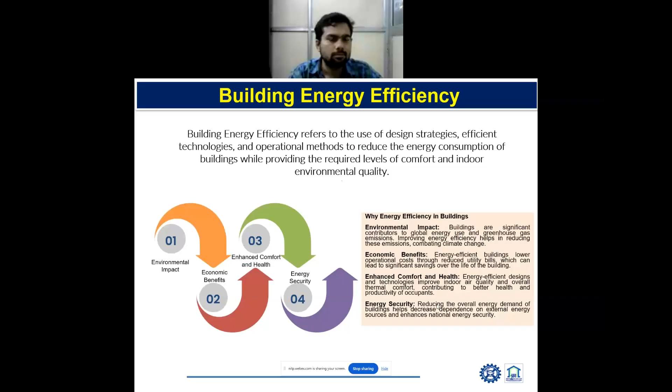So we need the design of the building in such a way that can take the fresh air while reducing the heat load or cooling loads. The fourth one is energy security: reducing the overall energy demand of the building helps decrease dependence on external energy sources and enhance national energy security.

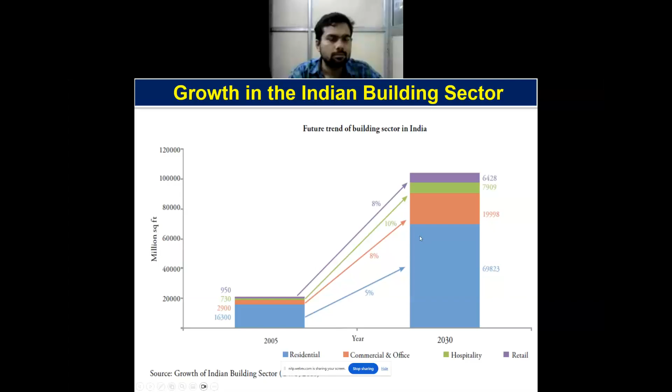So basically, what is the need? What is the strategy? Actually, we have two major measures that can reduce the energy consumption in the building. One is the passive measure, which can reduce the energy consumption in the building by reducing the heat load, reducing the cooling demand, reducing the energy use of light by using natural daylight, reducing the energy used for heating water, good housekeeping and people solutions, reducing the energy requirement for ventilation.

So these are the basic parameters: by designing and operating the building in an appropriate way, 40% of energy consumption in the building can be reduced, and the rest of the 60% energy we can take from renewable sources. So in this way we can achieve the net zero building, a 100% grid independent net zero building.

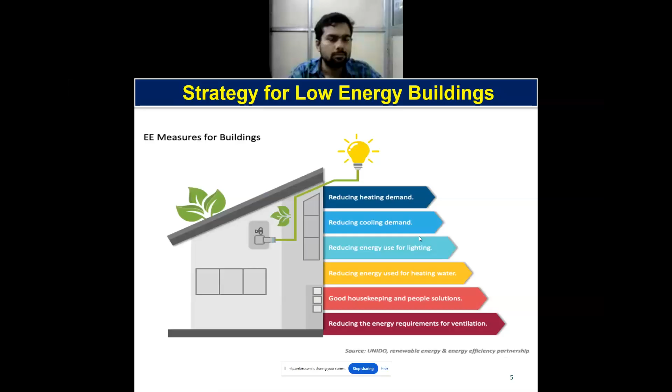So, in the previous slide, we discussed the passive techniques and the active techniques. The passive approach reduces the need for mechanical heating and cooling through design and construction techniques. Basically, in this passive technique, the major component of the building is the envelope, where we have the insulated wall, insulated roof, and natural ventilation, where we do not need any energy input to run the building. So the building envelope, smart glazing, and insulated roof come into the category of the passive parameters.

In the active category come systems like efficient HVAC systems, efficient artificial lighting, and efficient equipment. These techniques involve saving energy by efficient equipment, such as through mechanical systems, technology driven solutions, or integration of renewable energy. So these two parameters combine together to form a green building or net zero building.

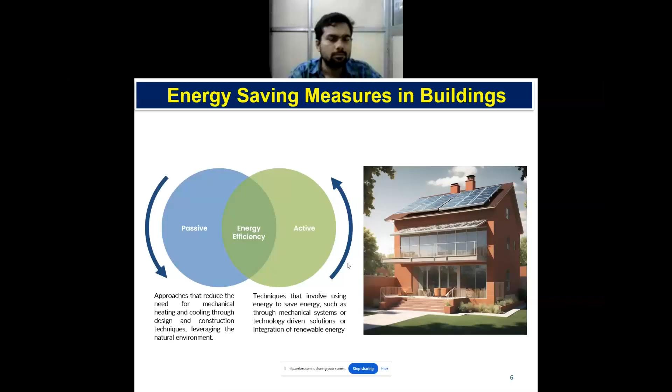So basically, how can we save energy in the building? By designing the proper building envelope. The purpose of the building envelope is to reduce the heat transfer from outside to the building or building to the outside. So it restricts the heat transfer, and basically reduces the HVAC load. The other point is the heat storage system. We can store the heat in the building, and then we can utilize it when we need it.

So passive strategies refer to building physics, in which the building geometry, natural daylight, and natural ventilation come into the category. Building geometry is an important aspect of the building, which can reduce the solar heat gain into the building. Natural lighting: the maximum amount of light we can get through the glazing. And natural ventilation can reduce the heating load or cooling load.

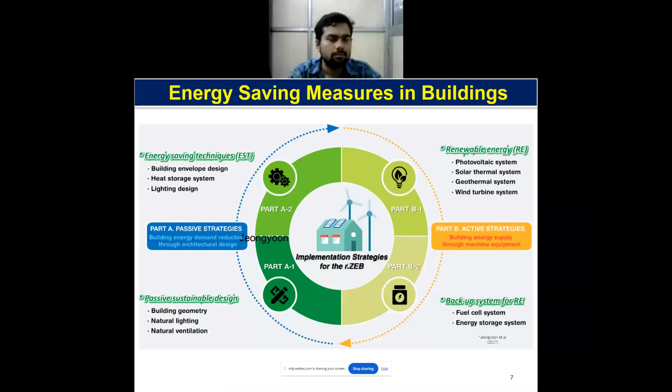Net zero energy consumption over here. So sir, your presentation is not visible. It is visible? Yes, sir. Now it's visible, sir.

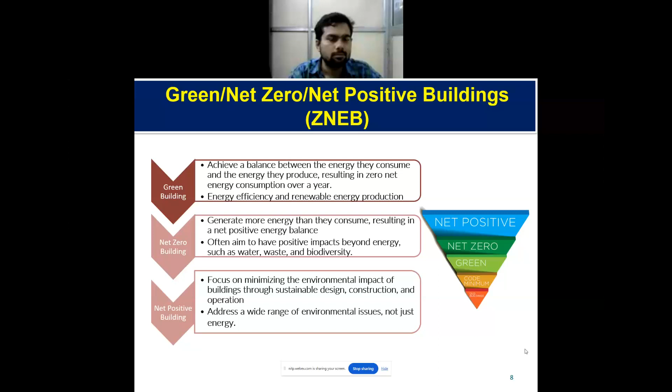Okay. So basically, green building, net zero building, and net positive building. Every green building can be a net zero building or net positive building. A net zero building is the building that can generate the same amount of energy that is consumed in the building. But a net positive building is when we are generating more energy in comparison to the consumption of the building. So every green building may be a net zero building or net positive building, but every net positive building or net zero building cannot be a green building.

So basically this is the roadmap to achieve the net zero building. A few major considerations are important for achieving the net zero building. First is the building physics, that comes into the category of the passive strategies. The maximum energy efficiency comes into the category of the active technology, the renewable energy, and the active strategies themselves.

So in the passive building physics, there are a number of parameters which can be considered to reduce the heat load of the building, like building massing, solar orientations, building envelope, natural ventilation, natural daylight, cool roof, night radiative cooling, low energy materials, and low carbon materials. They are the important parameters that can be considered to reduce the heat load of the building.

So if we have perfect insulation of the building envelope, or perfectly insulated roofing, we can restrict the heat transfer from outside into the building. It can reduce the heat load, and by reducing the heat load, we can use a low capacity HVAC system. Solar orientation is also important.

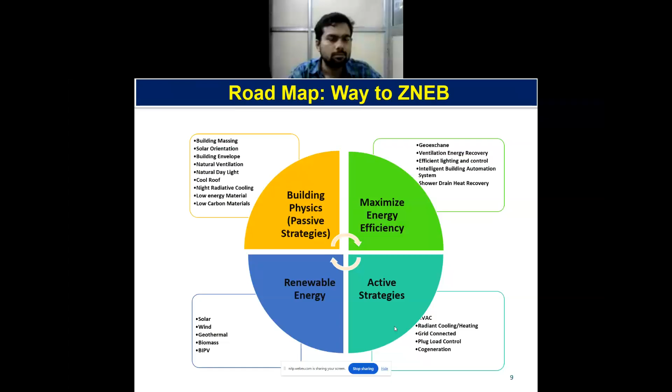So to maximize the energy efficiency, we can use geo exchange ventilation, energy recovery, efficient lighting and control, intelligent building automation system, shower drain heat recovery. We can integrate the renewable energy: wind, geothermal, biomass, BIPV. The active strategies: HVAC system, radiant cooling, heating, grid connected plug load control, cogeneration system. So by implementing these technologies, we can get the net zero building or even net positive buildings.

So these are the strategies in the passive solar design: orientation and window placement are very important. Window placement should be in such a way that in the summer it reduces the heat gain into the building, but in the winter it can provide the maximum solar gain to maintain a high temperature in the building. So window placement and shading devices also play an important role in the building envelope. So these are the three important parameters: orientation, window placement, and shading devices.

In the building envelope: insulation, air tightness, and double or triple glazing. Basically, the insulation restricts the heat. Air tightness: if we have natural ventilation or a 100% HVAC system, the infiltration of air can increase the heat load. So buildings should be designed in such a way that they reduce the air infiltration.

Glazing, double glazing or triple glazing, that can help to increase the solar intensity into the building, but it can reduce the heat load. Natural ventilation, cross ventilation, stack ventilation, and the ventilation towers. So these techniques can help to use the natural ventilation into the building.

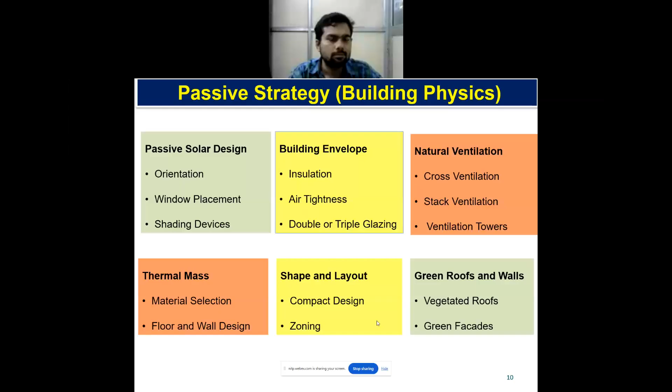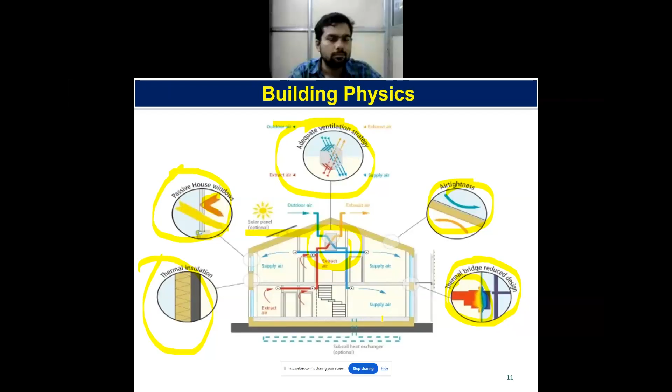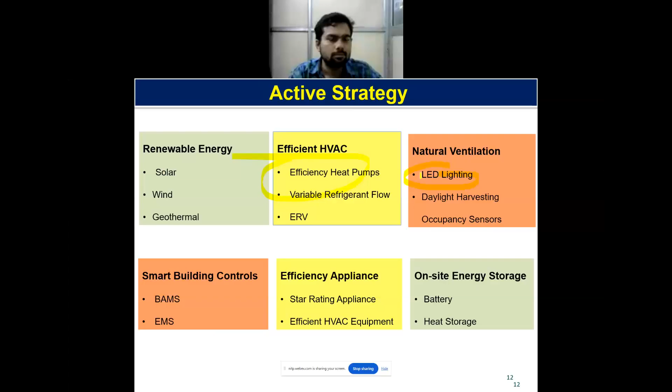And we can use natural daylighting in combination with artificial lighting, daylight harvesting, and occupancy sensors. We can also use building automation and management systems for controlling the equipment in the building like the HVAC system, artificial light, and other equipment. So when we need it, it can be on, and when we do not need these systems, it can be off automatically.

Now we have other equipment that comes with energy efficiency, with star rating appliances, like ACs, washing machines, refrigerators. So we can use the high star rating appliances provided by various companies nowadays. So we can use highly efficient equipment.

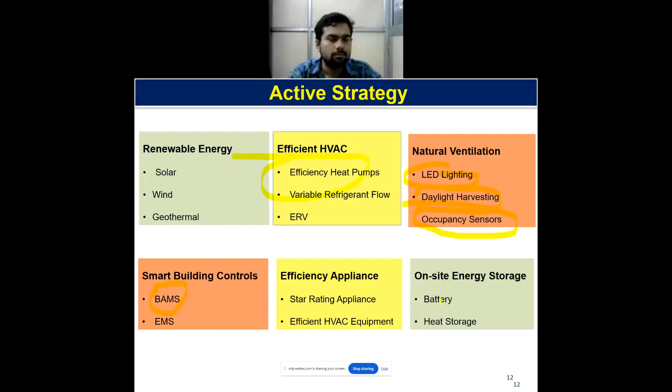Other is the on-site energy storage. We can store the renewable energy in the form of battery or heat storage. So excess energy can be stored, and we can use it when there is no energy supply, or even use it in the night time.

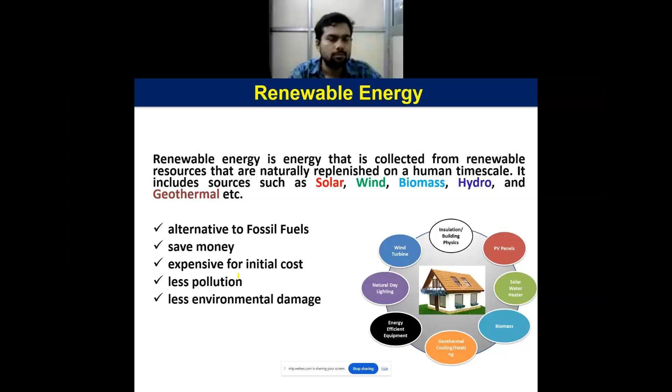So these are renewable energy sources that can be renewed time to time, unlike fossil fuels like crude oil, which can be finished after a few years. But the renewable energy sources do not finish; by nature they can be renewed again and again for the next usage.

So the first one is solar energy. Solar energy basically has huge potential in the form of renewable energy.

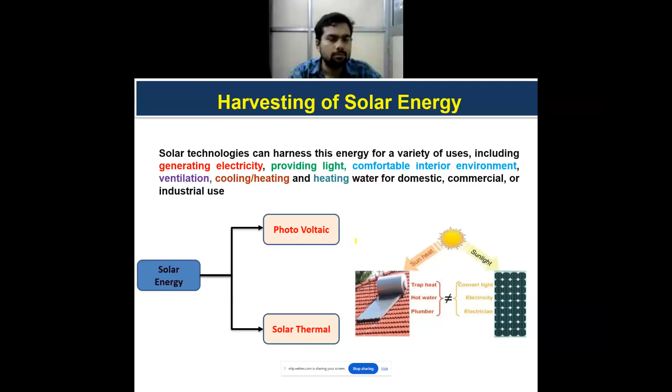But we can also use thermal energy in the building in the form of hot water, cooling, heating, in different systems such as a hot water heater, or for heating the building.

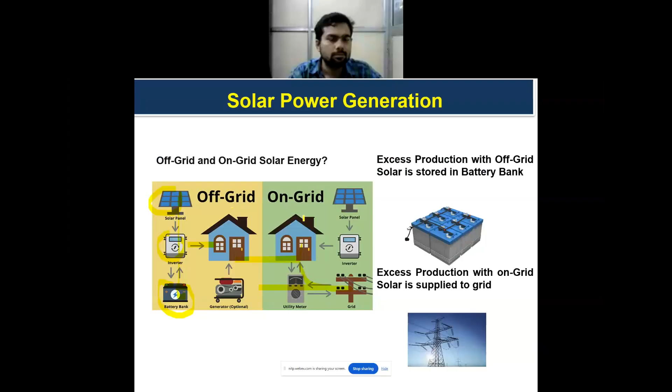So basically, how can we utilize thermal energy in the building? This thermal energy can be utilized in the form of hot water, in the form of thermal energy. The solar thermal collector converts solar radiation into thermal energy in the form of hot water, hot fluid, or the thermal energy of phase change material.

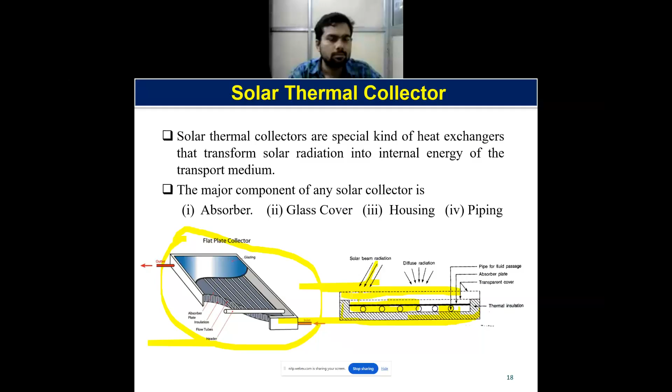In this diagram we can see a basic solar thermal system with a very simple thermal collector. We have the glass cover, the absorber, the tube in which the fluid is flowing, and the housing. In this simple thermal system, solar radiation falls on the absorber plate, and the absorber plate gets heated. Below this absorber plate there is a tubing system in which water flows, which extracts the heat from the absorber plate. So these are the basic energy balance of the solar thermal system.

So we have the two components of the solar energy in the form of input energy. One is the diffuse radiation, one is the direct radiation. So apart from the input energy in the form of solar energy, we have losses like conduction loss 2 to 5%, reflection loss 2 to 5%, convection loss 2 to 5%, and we have the

heat gain to the heat transfer fluid, and we have other losses like natural convection losses to the environment. So there are a number of losses there, but up to 60% of the energy can be absorbed in the form of thermal energy and can be stored into the

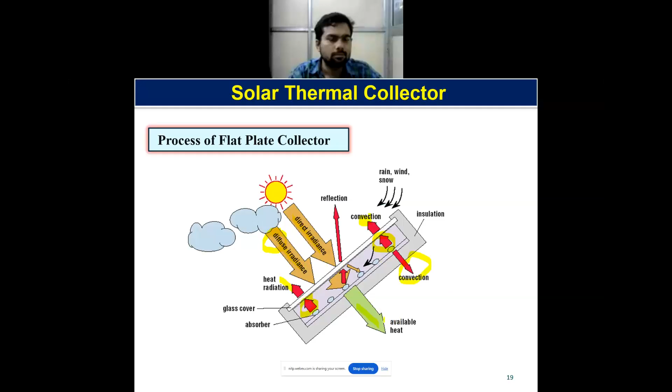The overall heat loss coefficient is the summation of the top loss heat coefficient, back loss heat coefficient, and the edge loss heat coefficient. Out of the three, the major component is the top loss heat coefficient. It is about 60% of the overall heat loss coefficient. So maximum heat is going to waste into the environment by means of the top glass cover.

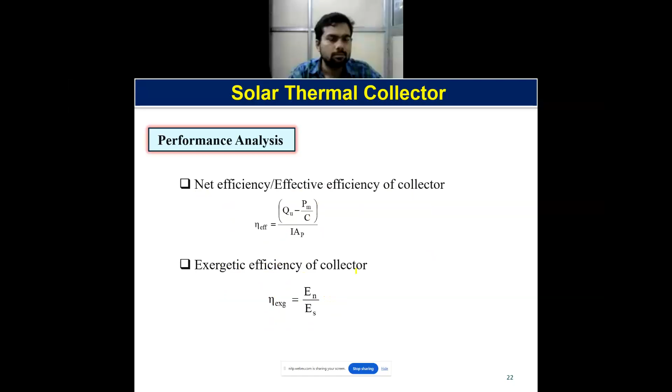So there are some other formulas for calculating the net efficiency, effective efficiency, and exergetic efficiency of the collector. Basically, to increase the performance of the thermal system, we have different technologies and techniques like multiple glazing that restricts the top loss coefficient, but it reduces the heat transfer and radiation that reaches the absorber, so it is not an effective way to maintain the radiation reaching the absorber.

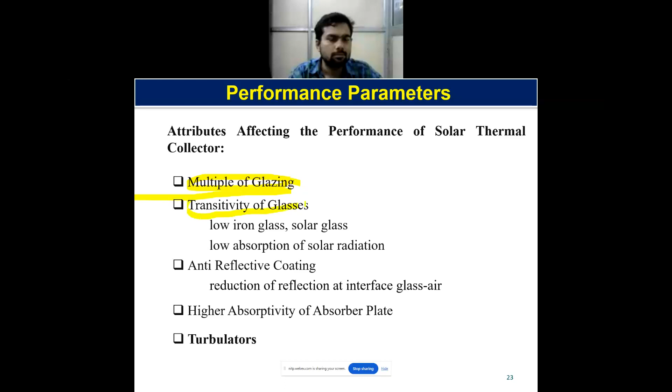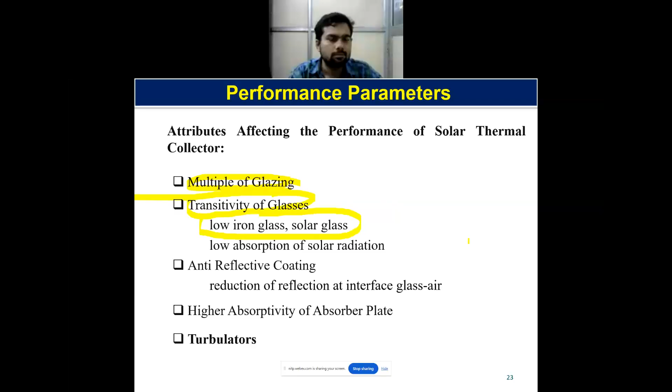Transmittivity of the glass. So transmittivity of the glass plays an important role; low iron glass, solar glass can be used to utilize the maximum amount of the solar energy that transfers through the glass cover. Low absorption of the solar radiation, and anti-reflective coating that reduces the reflection. High absorptivity of the absorber plate, and turbulators.

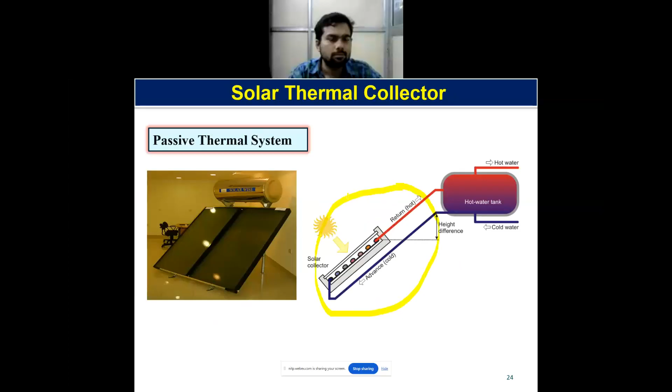Passive thermal system. Basically, passive thermal systems are those thermal systems which do not require any energy input to run the system. The entire system runs on solar energy. So these are the active systems. Active systems are those thermal systems in which we need electric power to run the system, to run the pump or other system.

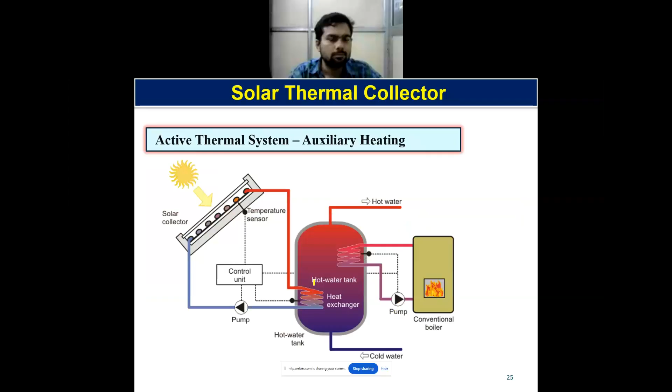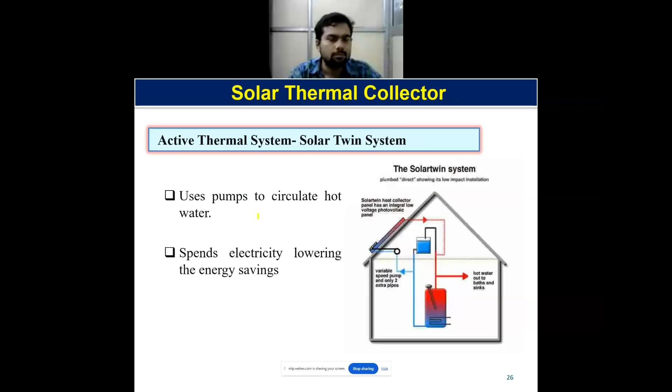So there is a major difference between the active thermal system and the passive thermal system. The active thermal system uses the pump to circulate the hot water, and consumes energy in the form of electricity. So basically, spending electricity lowers the energy saving. The purpose of using the pumping system is to extract the maximum amount of the solar energy. But in the passive system, we don't have any circulatory pump, so it circulates the fluids by means of the density difference.

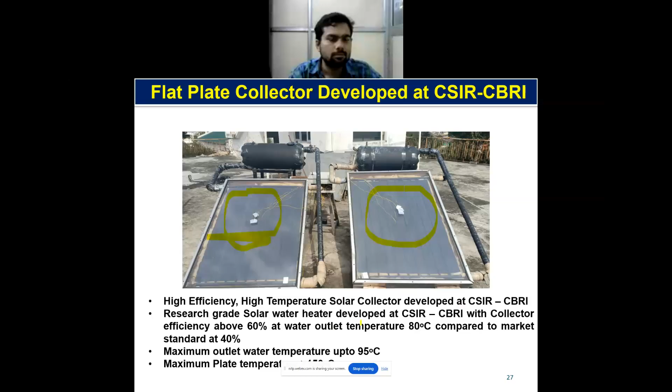Research grade solar heating system developed at CBRI with collector efficiency above 60%, where the outlet temperature of the water is 80 degrees centigrade. The maximum temperature in the tube reaches up to 95 degrees, and sometimes it reaches above 100 degrees, when the water can boil. So these are a few results of the single glazing and the double glazing collector.

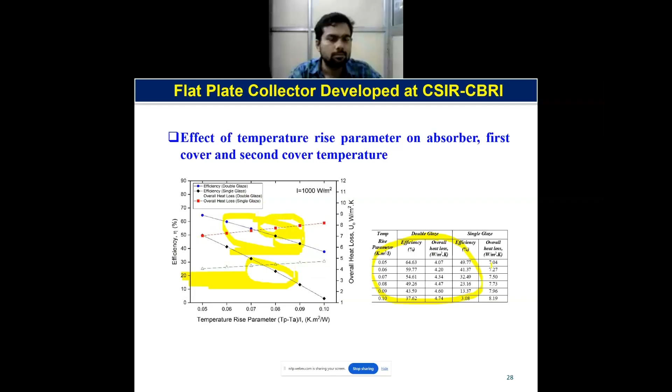There is another chart which can show the overall heat loss of the double glazing and single glazing by utilizing multiple glass in double glazing. So we can reduce the overall heat loss to minimize the heat loss to the environment. These are the few data which we have plotted on this graph.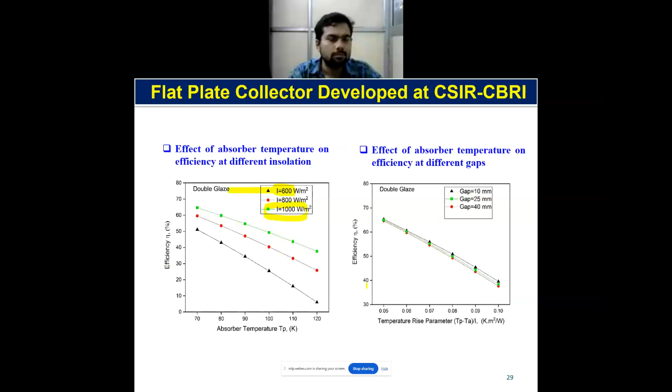We have a vacuum in between the absorber plate and the glass cover. Due to elimination of the air, there is a vacuum, so there is no natural convection. Only heat transfer from absorber plate to the outer glass is by radiation. There is no convection. So by minimizing the convection, it can retain the heat when receiving the solar radiation.

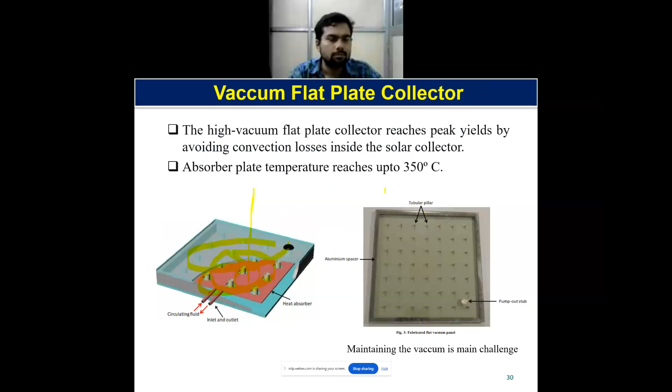In this type of solar thermal collector, the vacuum flat plate collector, the temperature of the absorber plate reaches up to 350 degrees. This is one example of the vacuum technology.

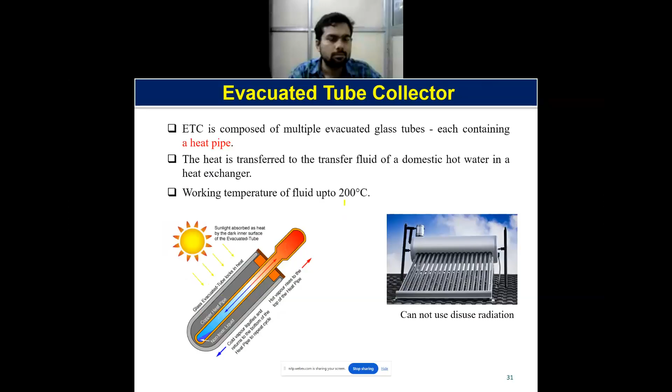So the evacuated tube collector is there, where we have the vacuum, there is no air, so it can retain the heat absorbed into the heat pipe, so it can transfer the high density heat to the fluid. The working fluid temperature reaches up to 200 degrees centigrade.

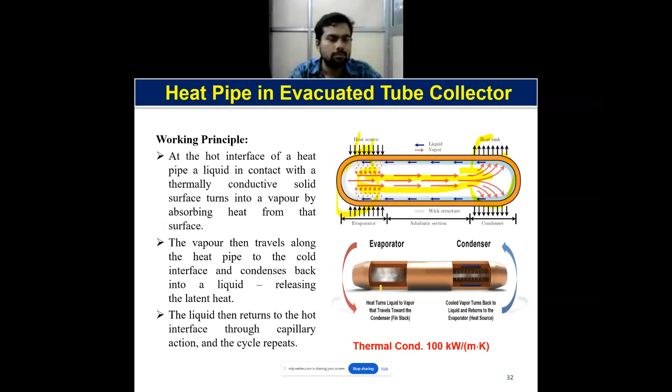The basic principle of the heat pipe used in the evacuated tube collector: there are two ends, one is the hot end, one is the cold end. There is a fluid at the hot source where we are getting the heat, it gets evaporated and traverses to the other end, and by capillary action it further reaches to the hot end by the fluid and evaporates. This basic heat pipe has a high thermal conductivity.

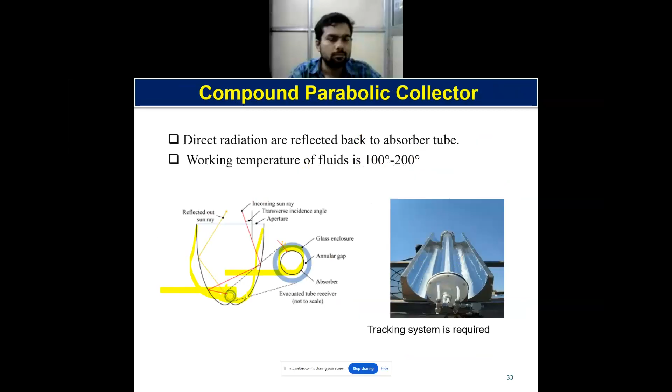The other thermal system that can be used in the building is the compound parabolic collector that uses a reflector which can concentrate the solar radiation on a particular energy absorber system, which has an evacuated tube collector. Its working temperature of the fluid reaches up to 200. It utilizes the direct radiation and radiation reflected from this reflector.

The other technology we have is the photovoltaic thermal collector that utilizes the PV panel as well as the thermal technology. The PV panel generates electricity, and the thermal system attached to the PV panel can generate thermal energy. So it is a dual purpose system. By a single system, we can generate electricity as well as thermal energy simultaneously. This is one advantage.

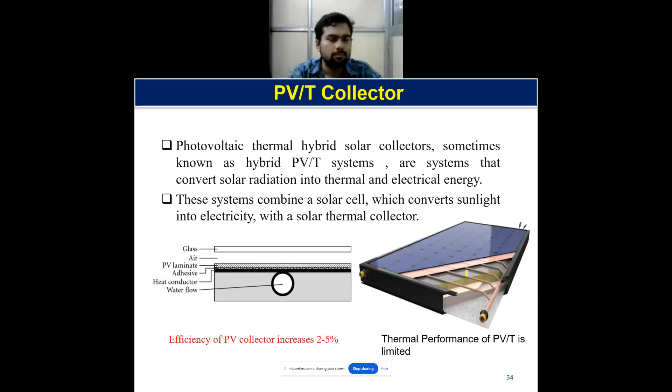The other advantage of this system is when the temperature of the solar cell is high, the efficiency of the PV panel is too low. So by extracting the thermal energy from the PV panel, its efficiency is improved. We are improving the efficiency of the PV panel, and we are extracting the thermal energy of the system.

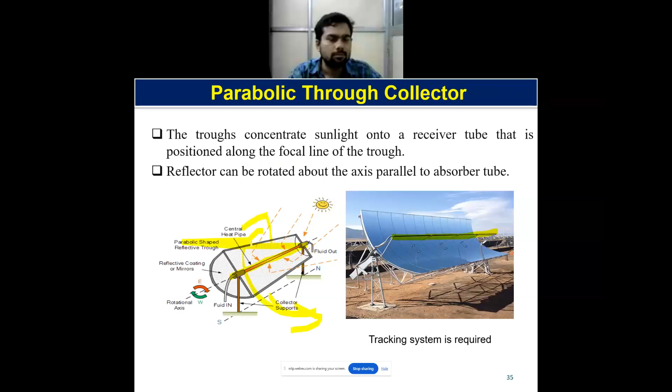These are dual purpose systems, and this is the parabolic trough system, where we have a big reflector and an absorber plate. Troughs concentrate sunlight onto the receiver that is positioned along the focal line of the trough. The reflector is a single axis collector. We can rotate the reflector in this direction, positioning it according to the sun position. So it can be a tracking system, and it can be fixed. It can reflect the solar radiation on a particular thermal energy absorber.

So we can utilize the solar energy into the building for heating purposes also. Basically, this technology is very popular in the Ladakh region, where we have direct sun radiation. We are receiving the sun radiation through the window.

There is a thermal mass. In the daytime we receive sun radiation through the window, and we are heating the thermal mass placed below the floors. So in the night time it can radiate the heat which was absorbed during the day. In this way we can manage and maintain the temperature in the space.

Another point: the placement of the facade is also important, because in the summer we do not need sun radiation into the building, so it restricts the area of sun radiation falling into the building. But in the winter we need the maximum amount of solar radiation reaching a certain area. So in this way we can design the facade or shading device for the building.

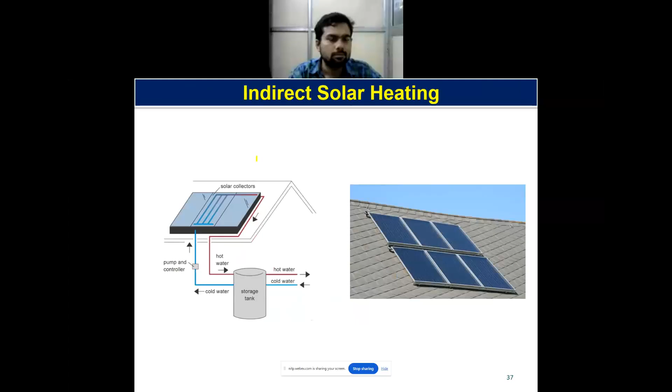In indirect solar heating, we can utilize radiant solar heating. This method intentionally uses the principle of radiant heat to transfer radiant energy from the emitting heat source to an object. This provides an improved climate and healthier humidity levels. The maximum temperature of the heating surface can vary from 29 to 35 degrees.

In this way, we can exchange heat between the human and the panel, which is placed on the wall or ceiling of the building. So there is no need for an air system; we don't need to circulate air into the space. We can exchange heat from the human to the radiating panel, so it has high efficiency compared to air-based cooling and heating systems.

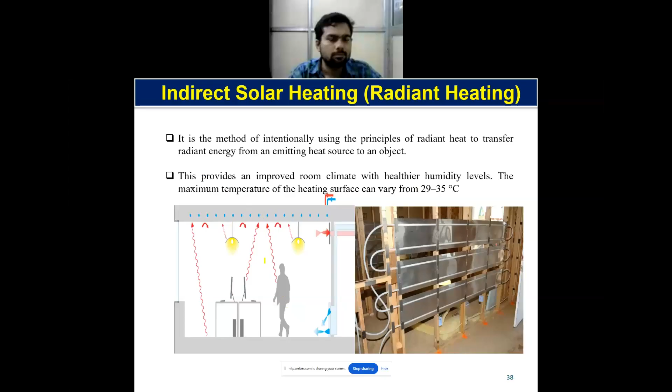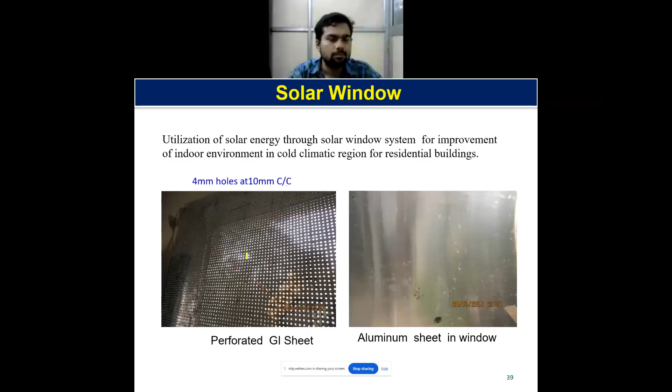Another system is the solar window. Previously, the solar window has been utilized for heating in the building. This system was developed at the CBRI by one of the scientists from CBRI. So here are some graphs.

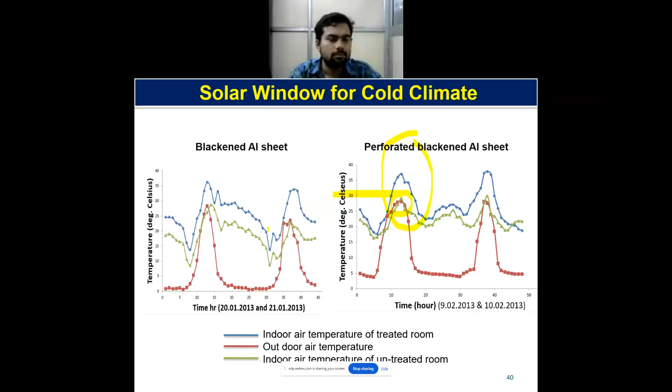You can see, by using the blackened aluminum sheet and the perforated blackened aluminum sheet, that in case of the perforated blackened sheet, the indoor air temperature is higher compared to the blackened aluminum sheet. Basically it absorbs heat from the solar radiation and maintains the room temperature.

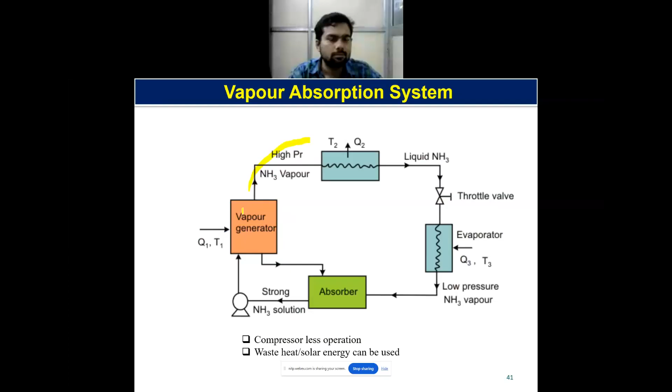So the energy can be utilized for the building in the form of cooling. These systems utilize thermal energy, which was used for heating, for cooling purposes as well. For this, there is the vapor absorption system, which can generate cooling from waste energy or the solar energy system. It is a very popular system that can be utilized for cooling in the building.

Another is desiccant-based cooling. In this technology, at CBRI we work together. We have a thermal system with three major components: one is the thermal collector, one is the desiccant wheel, and one is the indirect evaporative cooler. These three major components are used in the desiccant-based cooling system.

Basically, in a direct desert cooler, air is passed over a cooling pad, which increases humidity but cools the spaces. But in desiccant cooling, we have the supply air.

It can extract heat from the desiccant wheel by removing moisture from the incoming air, and this dehumidified air is further cooled down by the heat recovery unit and the indirect evaporative cooler. So we are doing two processes for the incoming ambient air: in the first process we are removing moisture, dehumidifying, and in the second process we are cooling, reducing the air temperature.

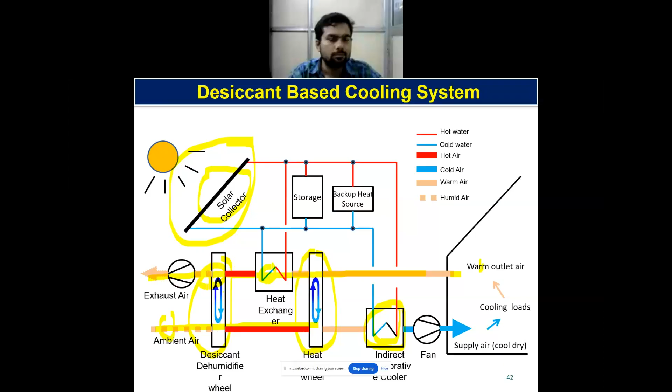So basically these are the three major components: thermal collector, desiccant wheel, and the indirect evaporative cooler.

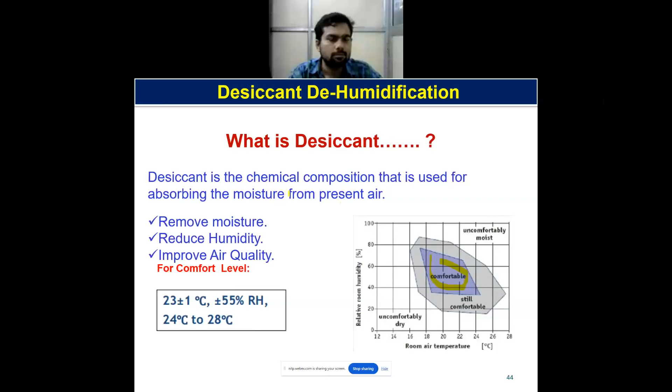Basically, desiccant is the chemical material used for absorbing the moisture from the present air, removing the moisture, reducing the humidity, and improving the air quality. For comfort level, we have to maintain a 23-degree temperature with a relative humidity of around 55 percent. So in this technology, we are controlling the moisture in the air and controlling the temperature of the air.

Basically, in the desiccant wheel, the incoming dry air has moisture. We are reducing the moisture from the desiccant wheel, and we have the returning air from the space. So we are heating this, and hot air can be supplied through this wheel so it can remove the moisture for the regeneration process.

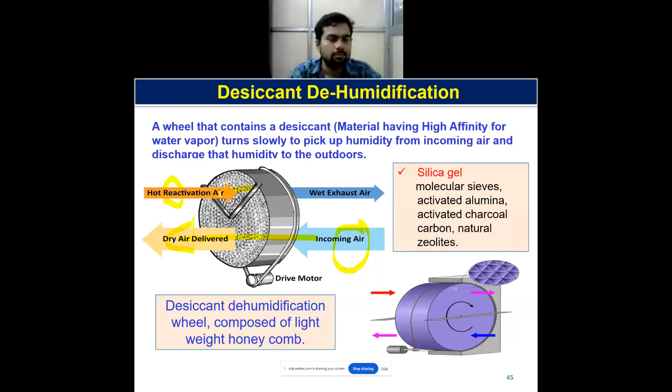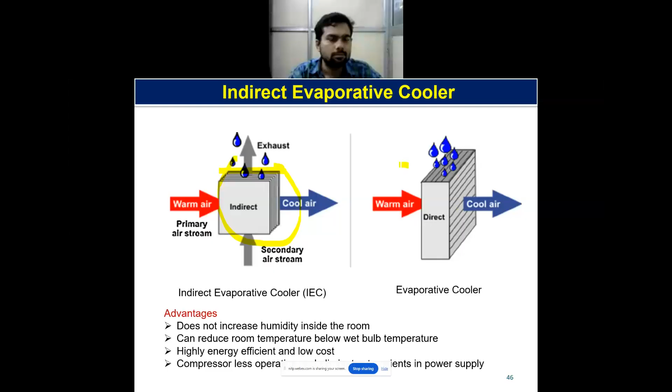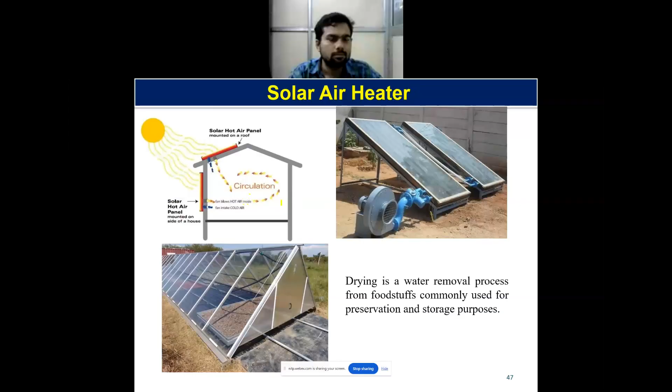So this is one of the technologies that we can integrate into the building or even agriculture: the solar air heater, which removes moisture from the air and can be heated. Basically it dries crops and dries spaces which need to be heated. We can utilize this technology in winter also for heating the spaces in the building.

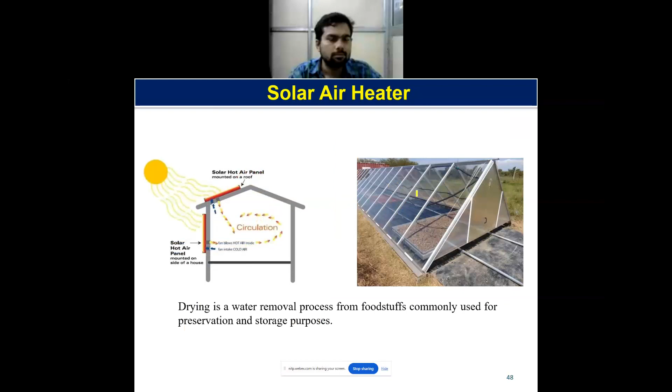So drying is a very popular technology, particularly for drying crops or even for preservation or storage of greens.

Basically, in the solar air heater we have a simple design. We have the absorber, below the absorber we have the air passage, and we have the glass. When the radiation falls over the solar absorber through the glass cover, the temperature of the absorber is high. So the incoming air extracts the heat from the absorber and transfers it. The absorber plate, glass cover, insulation, air flow passage, and blower are the main components of the solar air heater.

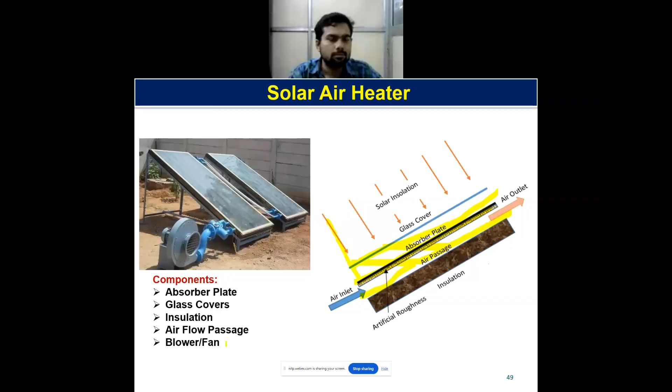So this is the basic design. Nowadays, very advanced solar air heaters are available in the market that can be utilized in buildings for various purposes.

One of the solar cookers that was developed at CSIR CBRI can be used as a dryer. The solar cooker has an insulated box topped with a transparent glass or plastic cover, and it has a reflector that helps maintain the heat in the box.

The cooker can cook two items at a time: dal, rice, or can dry vegetables or fruits. It is a very cheap system.

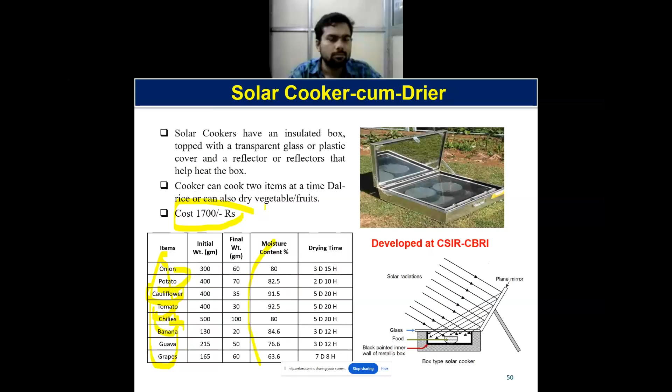So these are some examples of drying vegetables, we have the data. It takes 3 days to reduce the moisture content by 80%. We can dry potato, cauliflower, tomato, chilies, banana, guava, grapes. This is very useful for the household. We can even make rice, dal, or different boiled meals cooked in this system.

When the air is in contact with this thermal system, it gets heated due to the density difference. When that density difference is there, it transfers to hot air and rises. So there is a natural stack created at the bottom, and by creating the natural stack, it sucks in the fresh air. In this way we can utilize natural ventilation by using the trombe wall.

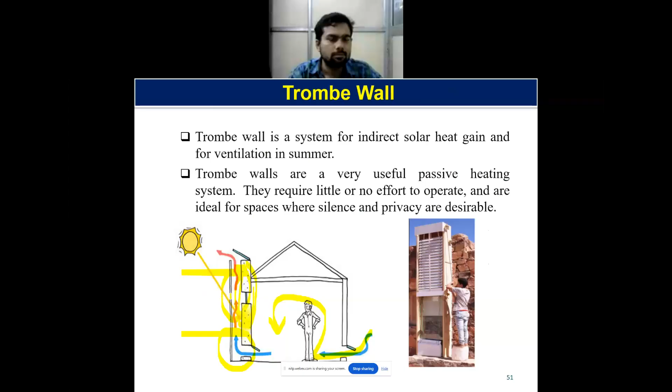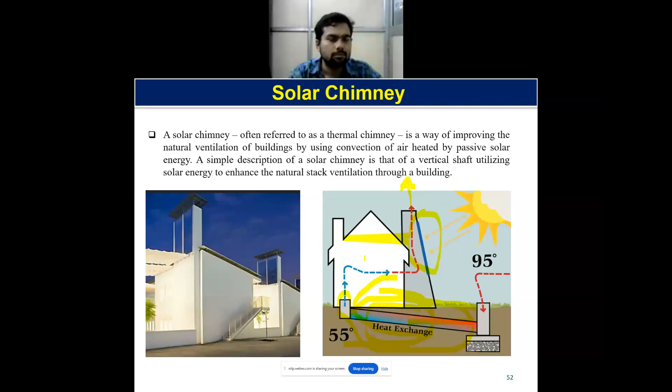So basically these are the systems that can be utilized in the building, and not only in the building. We can utilize these systems in our daily life to reduce the dependency on fossil fuel or the electricity supplied through the grid.

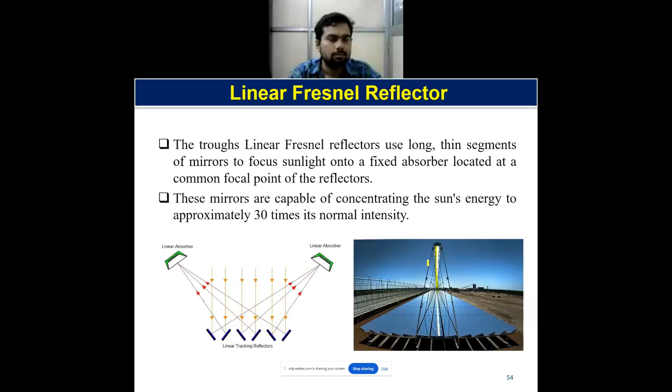So its temperature reaches approximately 30 times concentration ratio in comparison to the flat plate collectors. So it can generate high thermal energy to drive the turbine for generation of electricity.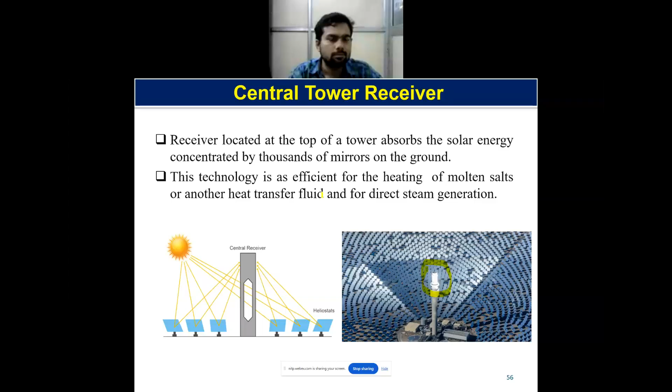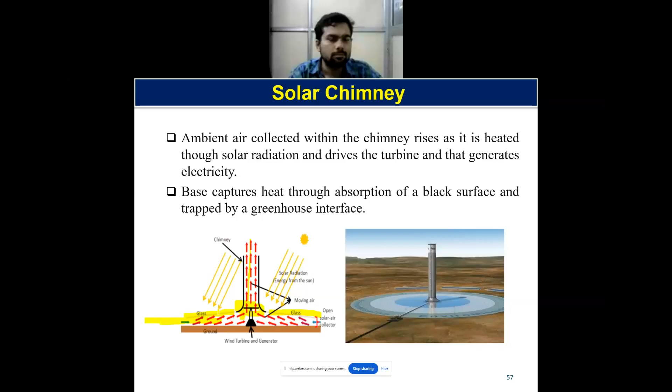So below the absorber, the air is passing, and due to the heat accumulated below the absorber, it gets heated. Due to the density difference, it goes up and it drives the turbine to generate electricity. So basically, these are the technologies for the generation of electricity.

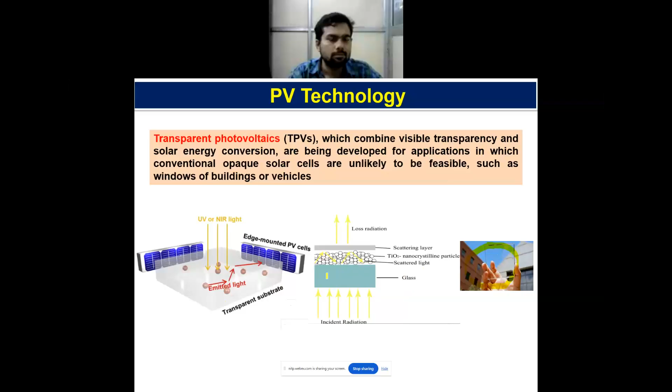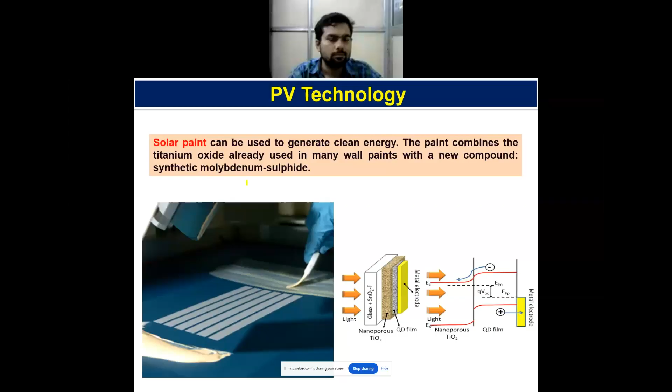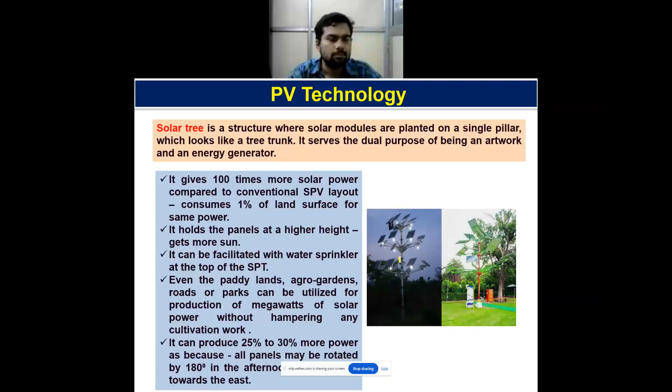It holds the panel at a higher height, so it gets more sun. So basically, the main purpose of this technology is to save land while using solar power generation.

Tri-generation is very common in buildings. Basically, we need energy in the form of cooling of the building, in the form of electricity, and in the form of heat. So tri-generation serves all the purposes for the building: a single fuel can generate electricity, produce cooling in the building, and produce heating in the building.

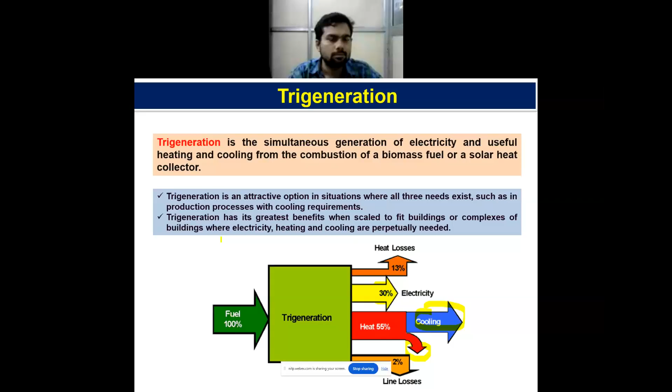Tri-generation is an attractive option in situations where all three forms of energy are needed, and it simultaneously fulfills the cooling requirement, the electricity requirement, and the thermal energy requirement. So basically, different kinds of generation systems exist and can be employed in the building.

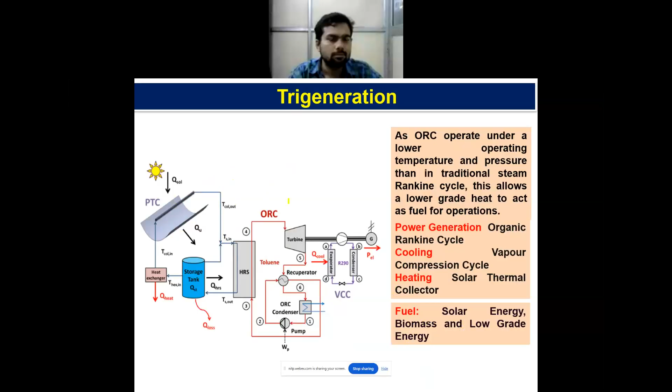The basic one is the ORC, operated under a low operating temperature. In this organic Rankine cycle, it not only generates thermal energy, it can generate electricity, and it can generate cooling for the building.

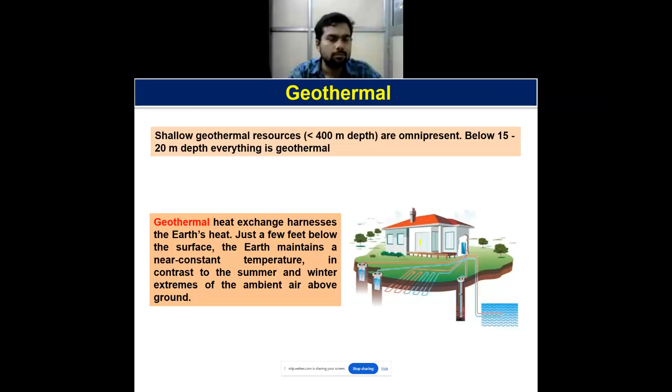We have discussed the solar thermal system. We have discussed the geothermal system. We have discussed many solar systems which can generate electricity. We can generate natural ventilation by solar energy. We can generate cooling and heating for the building. So basically, these active renewable energy systems can be utilized in the building to fulfill the rest of the energy that remains unsatisfied by the passive parameters.

Now I would like to discuss the star rating for buildings. You are aware that the different systems present in the market have a star rating. These star ratings are not only developed for the AC, refrigerator, and washing machine. They are also developed for buildings.

There are different star ratings available in India, like the building energy efficiency star rating, Green Rating for Integrated Habitat Assessment, Indian Green Building Council rating, and Leadership in Energy and Environmental Design. These are the four basic star ratings for buildings available in India. We will discuss the most popular star rating for buildings.

It was developed by the Bureau of Energy Efficiency. The star rating of the building is based on the actual performance of the building in terms of specific usage, kilowatt hour per square meter per year. So basically, buildings are labeled from 1 star, 2 star, 3 star, 4 star and 5 star based on the specific energy usage in the building.

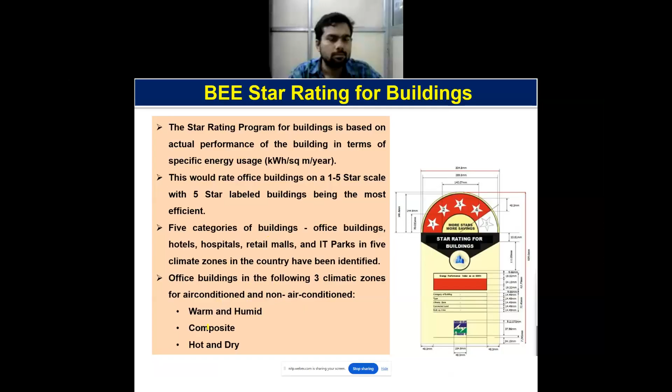Identified office building in the following. The office building has been categorized into the three climatic zones for air conditioning and non-air conditioning. The star rating of air conditioned and non-air conditioned buildings has been developed for the warm-humid, composite, and hot-dry climate. So basically, there are two types of office building: one which has less than 50% air conditioning and one which has more than 50% air conditioning.

So basically for the hot and dry, warm and humid, composite. So when the EPI is 65 to 75 of the building in the hot dry climate, when the building has 50% air conditioning, a 1 star building is there, 2 star building when the EPI range is 55 to 65. So there is a different range for the different climate zones, warm humid, composite.

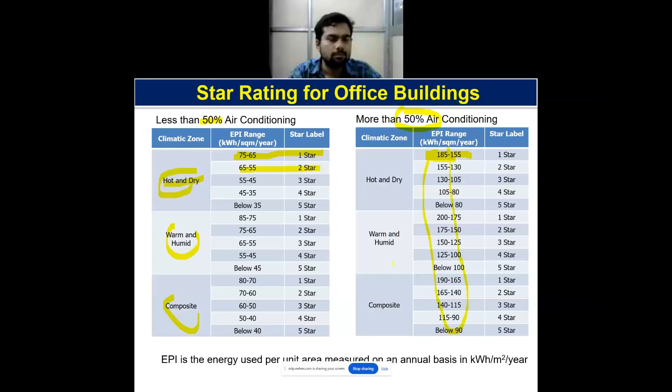When the HVAC system has more than 50% air conditioning, then the EPI range suddenly increases, because when air conditioning is there, it consumes a lot of energy. So considering that point, the EPI range increases. It's 65 to 75 in case the building has less than 50% air conditioning, but 155 to 185 EPI in case the air conditioning is more than 50%. So these are the different EPI ratios for hot and dry, warm humid, and composite climate.

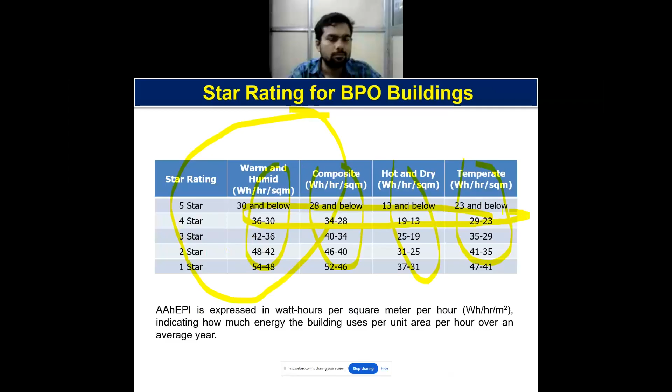So star rating for BPO building, AAhEPI. So basically, this is the star rating for the BPO building where we have 5 star, 4 star, 3 star, 2 star, 1 star, and this data refers to the warm and humid, composite, hot and dry, and temperate climates. So on the basis of this data, we can decide whether the building is 5 star, 4 star, 3 star, 2 star, or 1 star.

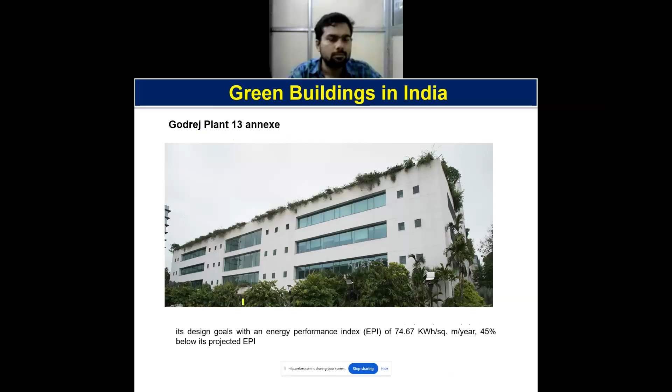So basically, there are a few examples of buildings that are green buildings or net zero buildings. The first one is the green building in India, Indira Paryavaran Bhavan. It is a 7 storey building plus 3 basements. It has a PV rooftop. It has geothermal. So it is a net zero building as per the building rating. Another building is the Godrej Plant 13 annexe. Its EPI is much below the projected EPI, and it is a 5 star rated building constructed in Mumbai.